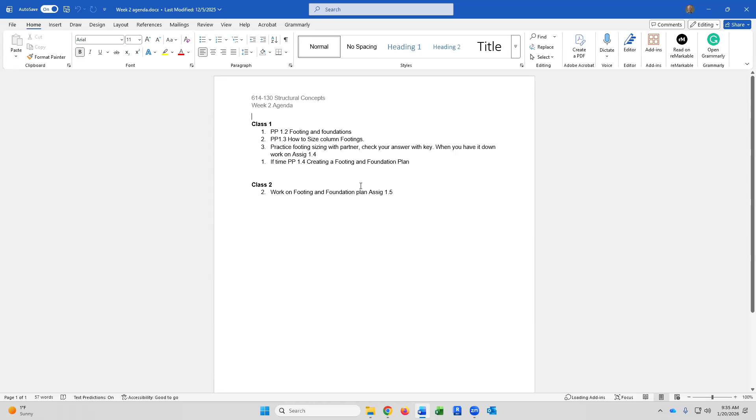Let's look at footings and foundations.

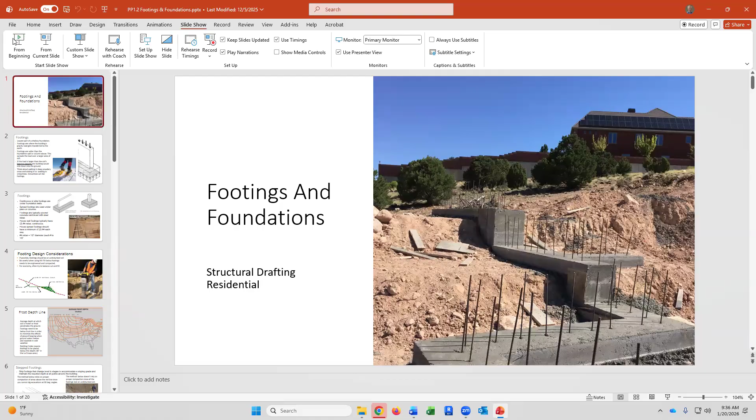I kind of like this picture because it shows a couple things. This is probably a walkout basement, where the foundation has to step out and we're at the lower level looking up the hill. A couple things I wanted to point out.

When you dig a step in the dirt, you can't dig a 90-degree step because the dirt would collapse down - it's not a solid material. The dirt's got what they call an angle of repose. So everybody understands, if it's loose soil, not like clay, you can't cut a 90-degree angle in and expect it to stay - it'll mush out. So as they dug this in different levels for the steps, they've got this angled part here and this angled part here.

Now there's two different ways of doing it, and I've seen both ways on the site. I have an idea that one way is better than the other. One way is they form it up like it's cut at a 90-degree angle, and then try to pack dirt in underneath that area. The other way is saying we know we can't really pack dirt in at the right compaction there, so we pour the bottom of that footing at an angle to match the angle of the dirt. That's the better way. Now why don't people do it that way?

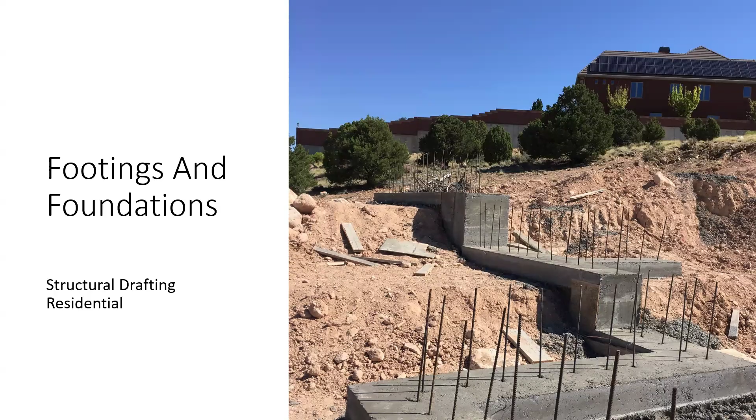So working from the ground up, the bottom part of a building is called a footing. It's the lowest part of the building, the part where the building's load, the gravity load, gets transferred to the dirt or the earth. So the footings are typically wider than the foundation wall or the column above, to spread the load over a larger area.

If we somehow had a building where the load is more than what the soil's bearing capacity is, the building actually sinks down into the ground because it's putting that load on a very small area of soil. So we want to spread it out so that if the soil can take 2,000 PSF, we have to spread that load out so it's 2,000 PSF maximum.

Does that make sense? The way you can kind of visualize this in our climate is, have you ever tried walking through really thick powdery snow and sunk down into it? That's what your building theoretically would do if your footing isn't big enough. So in certain conditions, you can put snowshoes on and walk on top of the snow, spreading your load out over a bigger area so you don't punch down into 3 or 4 feet of snow every time you try to walk through it. You can walk on top.

When I was younger, people had snowshoes and everybody had snowmobiles because we had so much more snow. I know the climate's changing, we're not going to get into why, but it's definitely changed over my lifetime — snowbanks 5-6 feet high all winter long, snow all the time. Everybody had snowmobiles, snowshoes, cross-country skis. It's not quite like that anymore. We do get snow, but not near the depth. So maybe you've never used snowshoes, but just take my word on it.

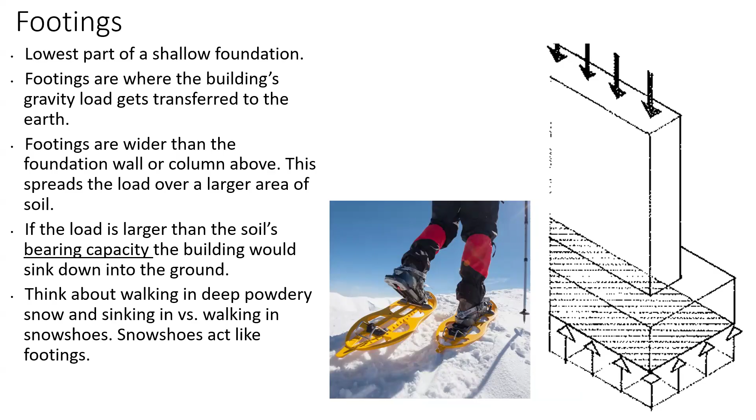Okay, so we have two different kinds. There's one footing that's under a wall, called a continuous footing or a strip footing, also called a wall footing as you see on the diagram. Then you can have an isolated column footing, also called a spread footing, which is under piers or columns. Those are the ones we're going to be sizing in our assignment today.

So they're typically poured concrete, reinforced with steel rebar. Houses typically use 2 number 4 continuous bars. This one looks like 3 number 4 continuous, so it's got one row here, one row there, and one row there. When they say continuous, they overlap them rather than having one piece of rebar that goes around the jigs and jogs, and they tie them up with wire ties to keep them together.

Then for house spread footings, they typically put 2 each way, 2 number 4 rebars. When I say number 4 rebar, each number is 1/8 of an inch, so a number 4 rebar is 4/8 or a 1/2 inch diameter. A number 5 rebar is 5/8 inch diameter. You're not being tested on that, but it's a way to visualize it - if somebody tells you they got a number 4 rebar, you know that's 1/2 inch diameter. That's a very common size in residential construction.

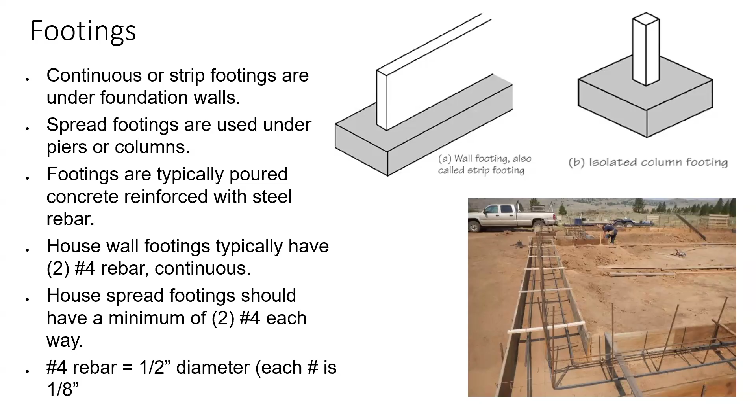And then these are like L-shaped rebars, and they cast those into the footing like you saw on the first slide, then pour the wall on top of it. So those L-shaped rebars tie the foundation wall into the footing when they pour that.

So if possible, we want our footings to be on undisturbed soil. Have any of you ever dug a big hole in your backyard and had this big pile of dirt that you never moved? Over the years, as it froze, snowed, and got rained on, it compacted down - going from 6 feet high to 3 feet high because the weather compacts it. Now the dirt we walk on has been here for thousands of years and it's already been compacted - it's gone through freeze-thaw cycles. But when you dig a hole and pile the dirt up somewhere, it's all fluffy.

Have you ever baked a cake and packed the flour into the measuring cup? You're not supposed to do that because your cake will get too much flour - it's supposed to be light and fluffy. It's the same sort of thing: you can pack soil down into a smaller area and it's much more compacted. We don't want to build our houses on fluffy soil. So that's called fill - when we bring in soil that hasn't been there for 1,000 years.

Here's where it can be a problem. Imagine you're building on the side of a hill and want to make a level area. In order to avoid bringing in a lot of fill or digging into the hill a lot, economically it's good to balance cut and fill. This is the cut, where we're digging out of the hill, and this is the fill, where we're taking that dirt and making a level area. If this cut area equals this fill area, I don't have to pay to bring in dirt, or truck dirt off my site. I'm balancing where I'm cutting out of the hill and where I'm filling to make my level building pad.

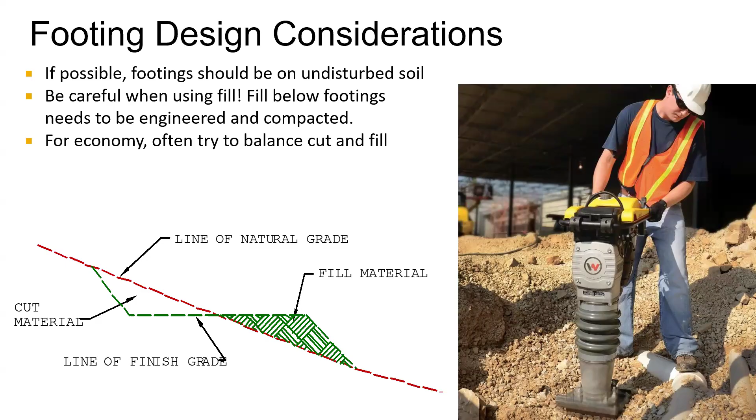They roll along and compact while they're rolling. This is called a jumping jack. When I worked at a design build firm, they made me go out on job sites, and this was one of my jobs, running one of these jumping jacks. It's kind of a pain in the butt, because if you get it off, it tries to jump at an angle and you've got to hold it up. But that's how they compact it. What they typically do is put a foot of fill down, run the compactor over it, put another foot down, run the compactor over it, because that's how they get it compacted evenly all the way up, even with like 8 feet of fill.

On a day like today, where it's below zero with a below zero wind chill, if Fluffy the cat dies and you want to dig a hole for Fluffy, it's going to be like concrete. You can't get a shovel into it, you can't dig into it, because that ground freezes and gets very hard, since the frozen water in the ground freezes in the areas between the soil and gets hard as a rock.

You see this a lot on farm buildings, because many don't have frost depth footings. My parents had a farm, and we had doors that wouldn't open in our buildings in winter when they would in summer, and vice versa, because the ground was heaving and the doors were moving up and down relative to the dirt. We also had a crack in our garage where in winter, when the ground froze, we had like a 2-inch crack we had to drive over to get into the garage, and in summer when the ground thawed, it would straighten back out.

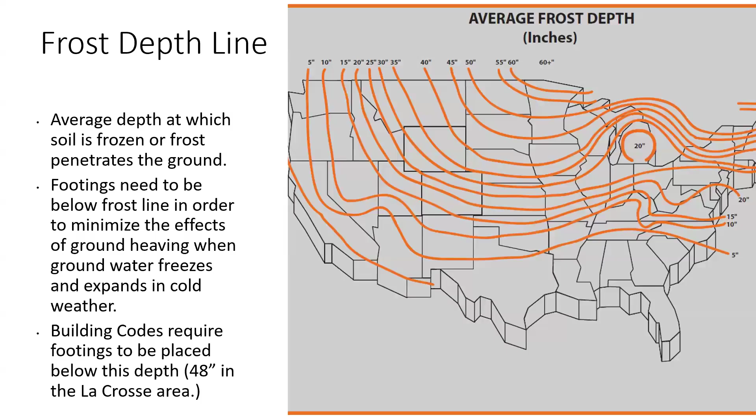Any questions? I've gone through 5 slides. Okay, I've got 15 more.

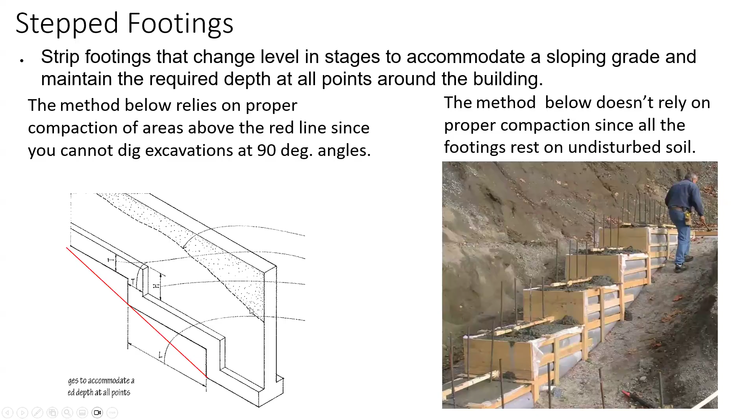Okay, so let's talk about the bearing capacity of soil. On a commercial project, almost always you'll have what's called a geotechnical report, or informally a soils report done. These are specialized people that go out there with specialized drills and figure out what the soil is and how much load in pounds per square foot it can take. Now, if your client won't pay for a soils report, it's not a bad idea to go out and talk to other people - if they're building a lot of houses around you, just see what the soils are like, talk to other contractors.

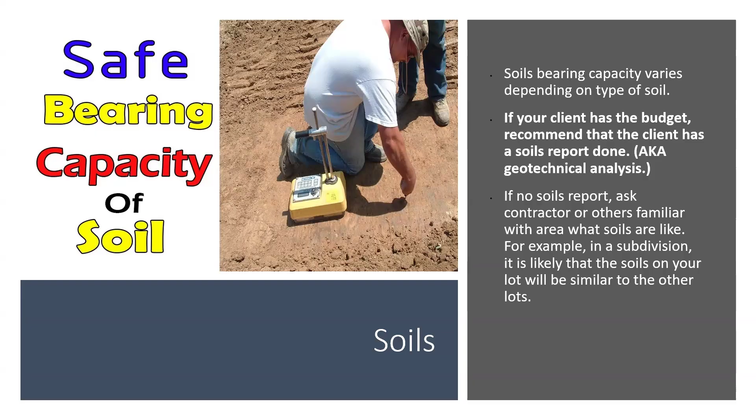Because you might find out, for example, that if you dig down 4 feet you hit water, so everybody's setting their house higher than they normally would, because there's a layer of clay keeping the water up there. So I'm going to show you on this next slide what a soils report is, how it's done, and what it looks like. They do like a hollow core, and they core down when they drill - they're not just drilling and forgetting what they're drilling through. They're actually saving core samples as they drill down, then pull it out, analyze it, take samples of it, test it in a lab, and figure out how much load it can take.

So for example, on this one, just because you walk around and it looks like good dirt, it doesn't mean you have any idea what's down there. Say your foundation on a commercial building is 10 or 12 feet below the natural grade - you have no idea what's down below you, right? It can be beautiful dirt all the way down, it can be sand all the way down, but you can dig down 5 feet and find a bunch of rotting tree stumps and peat, because it used to be an old marsh with a bunch of rotting vegetation underneath you.

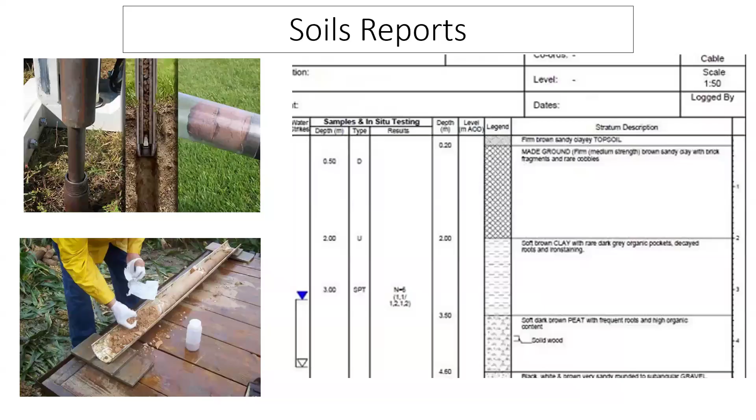So for example, this one here is clay with decayed roots and iron staining. This has got brick-made ground, so this is probably stuff they filled in on top of the old marsh that was there, which has brown sandy clay with brick fragments and rare cobbles. So like when they tore up the street, they're like, hey, dump it in my lot, I got this marsh I want to build on. Then the next layer down is soft, dark brown peat with frequent roots and high organic content with some solid wood. Now, do we want to build our houses on decaying vegetable matter? No, we don't, because it's going to keep decaying and decaying and sinking down. So around here you can run into peat because we've got marshes and little old lakes that used to be there. And I know that's what my name is, but peat is bad for buildings - we don't want our buildings to be in peat.

Okay, so I'm going to tell you 3 examples of why, in my career, soils reports are a good idea. I was working up in Wausau. We were building a building near the top of a hill.

I talked to the owner and the contractor, and this was a medical building that we were doing an addition onto. They said, well, we'll hit rock a few feet down, but it'll be soft rock and easy to remove with an excavator. So they didn't listen to me and refused to pay for a soils report. If the owner has to pay for the soils report, I can't force them to pay for it. If they're too cheap to pay for it, they just don't pay for it. So we designed the soils based on worst case scenario, 2000 PSF, which is the lowest bearing you can typically do, but we just believed them that we'd hit soft rock.

What happened was, where you put an elevator you've got to dig down even 4 feet deeper because the elevator's got a pit in it. So when they started to dig for the elevator, there was this vein of very hard blue rock that required very expensive special equipment, something like this, but with a tungsten diamond point on it because that was the only thing that would break this rock. Because it was next to a building, we couldn't just drill holes and put dynamite in there, or we'd have blown up the existing building.

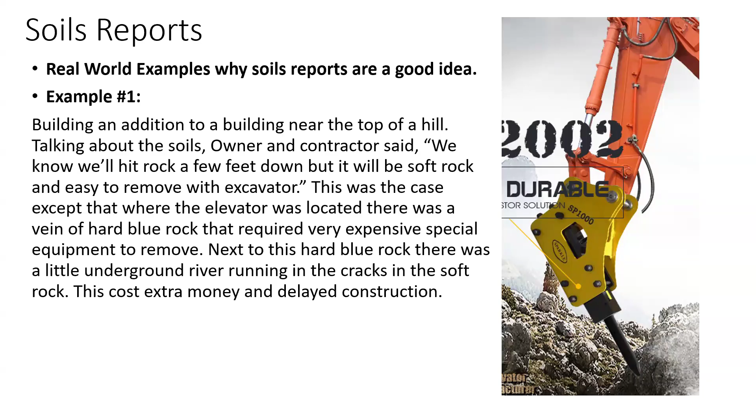So this all cost extra money and delayed construction. Now, if we'd have done a soils report and punched a boring down where our elevator was going to go, we would have at least known what the problem was. The other thing was, we might have decided, hey, let's try to punch a hole on the other side, maybe redesign our building so we don't have to go into the underground river here, and go on the other side of it instead. But they didn't listen to me, so they ended up taking a risk and that came back and haunted them.

Now, you're going to see a pattern here. I don't know what it is, but people, if money was at stake and I told them to do something to save money, oftentimes they wouldn't listen to me.

So here's another example, here in the La Crosse area. I'm not going to name the building, but I could. Why do we need a soils report? Again, the owner and the contractor both said they were adamant about it. They know this whole area is sand 20 feet down, because this is an old river valley. It used to be sand, sand, sand. We're not going to have any problems with soil.

So they dug down, sand, sand, sand. Then they got 6 feet down and there was a layer of impermeable clay with water sitting on top of it. The reason it had impermeable clay is back thousands of years ago, that was a little lake or marsh or something, and the clay had built up, which kept the water from draining down into the sand.

So what happens if you've got this huge area, like miles square, with this impermeable clay layer and water sitting on top of it? What happens when you punch a hole in it? All that water wants to drain down into the hole you just punched. So they're trying to dig the foundation and it's water, water, water. You just have to keep pumping that water out until you've drained all this water that's been sitting for hundreds of years on top of this impermeable clay layer. So this also cost extra money and delayed construction.

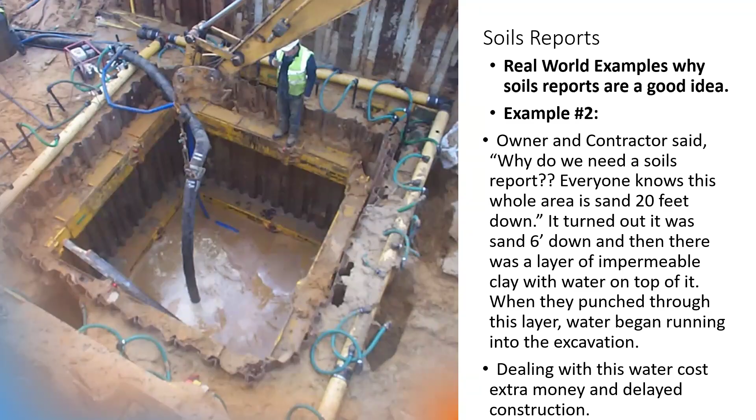The last one I'm going to talk about is one where we actually did a soils report and we knew what we came up with. I used to work at River Architects at the end of 7th Street, that big silver building at the end of that cul-de-sac. If you ever go down to get to the bike path, there's that big silver building at the end of 7th Street. Well, believe it or not, that lot we bought, when we did the soils report, there's marshes all around it.

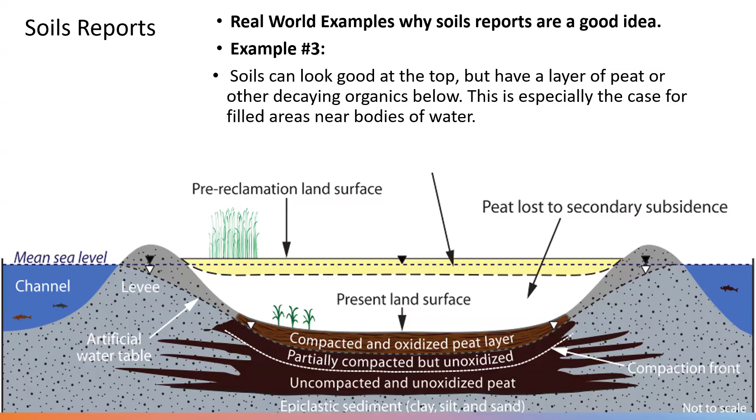The part we were on used to be a marsh, then they filled it in and put a junkyard there. So we were on fill on top of peat. Peat is like all the cattails and algae in a body of water that falls to the bottom but doesn't totally rot. It makes this spongy organic matter. If you walk through a marsh, you're walking on dead and decaying vegetation. That stuff keeps decaying slowly over time, so you can't rest your building on it because it will sink down and down. It was good we did a soils report there because we at least knew what we were dealing with.

Here's a chart from the Wisconsin Uniform Dwelling Code that gives you the various soil bearing capacities for different kinds of soil. If you can identify the soil, the code lets you go with these values, but the lowest is 2000 PSF. So when I don't have a soils report, some soils around here they'll go to like 2500 or 3500, but if they don't do a soils report, I would assume 2000 PSF to be safe because that's typically the minimum you can use.

I checked with the building inspector. Houses typically don't get a soils report, and footings are typically sized for 2000 PSF. I talked to the chief building inspector in La Crosse and that's what they told me. Commercial projects typically do get a soils report, unless the owner is too cheap to pay for it, and they'll tell you exactly what the allowable soils bearing capacity is.

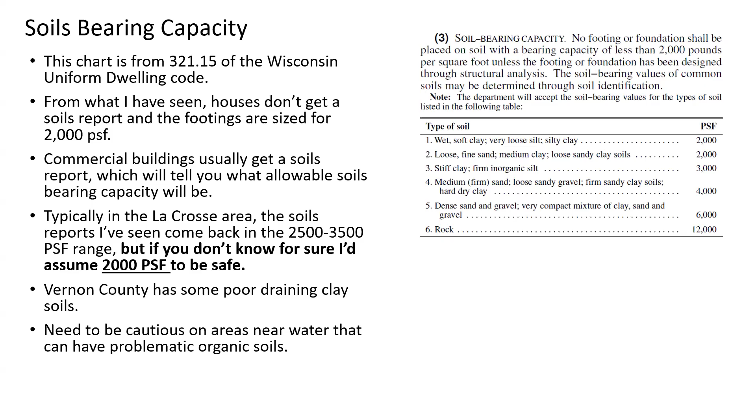Got to be cautious in areas near water because they might have organic soils, meaning peat. Vernon County is notorious for having poor draining clay soils. Around here it's rock and sand, because this area was all river valley at one point, with water from the bluffs on one side to the bluffs on the other, dumping a lot of sand. Vernon County has very poor draining clay soils. If you buy a house there, make sure you don't have water in your basement, because a lot of houses in Vernon County got water in their basement — the soils there are almost like a swimming pool liner, the clay is so tight it won't let water drain through.

Let's talk a little about foundations. Most of you probably grew up in a house with a basement, which is usable space under the first floor. Some of you might have grown up with a crawl space instead — that's when you only need to go down 4 feet for frost, so you just go down 4 feet and call it a day. They still let you have that space under the first floor so you can get to plumbing piping if it leaks, or run mechanical ducts or electrical down there. But it's basically built like a basement in most cases, just with less headroom.

Personally, I hate crawl spaces. Hate them, hate them, hate them. You already have to dig down 4 feet to get below frost — it doesn't cost much more to dig 4 feet further and have a full basement. Basements allow you to store stuff, have workshops or other uses down there, even play pool. If there's a tornado, you can go into the basement easily. If people are fixing your plumbing or heating, they're not crawling around hitting their heads on the floor joists because they've only got 3 feet of headroom.

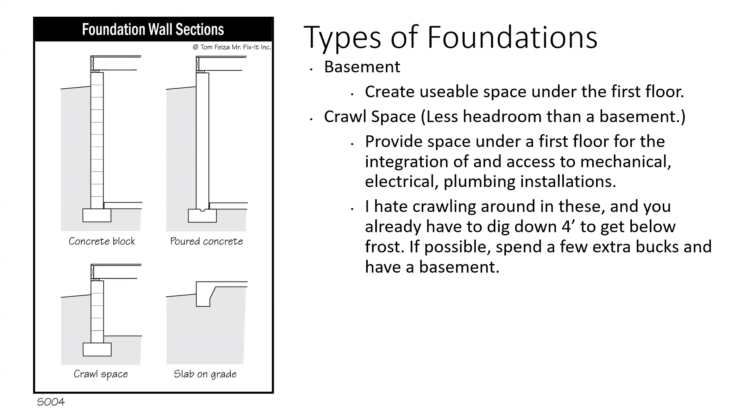Okay, so let's talk a little about slab on grade. The first thing is you got to dig down 4 feet anyway. So you're gonna have to dig a 4-foot foundation wall around it, and then you have your slab on grade. So the distance between your finished grade and the bottom of your footing has to be 4 foot minimum.

Now there is such a thing called a frost protected shallow foundation. The reason we have to go down below frost is that we're concerned about that frozen ground thawing and freezing and moving our house up and down. Well, the way we stop that, by not having to dig a frost wall, is we put insulation way out to keep that cold from the outside from getting in underneath our building. The ground's always at 50 degrees and our building obviously isn't 100 below or 50 below zero, so there's some heat here. So if we put a layer of insulation under the dirt, it will keep that cold from coming down and freezing the area directly under our building, and then we don't have to worry about our building moving up and down.

Now, in theory, you can do this on houses.

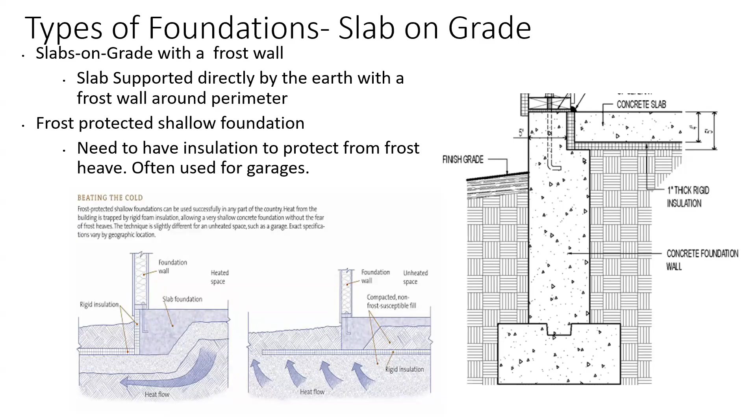At least when I was working, it was never done on houses, but a lot of times it was done on garages. Real world, are you seeing this on garages or houses or both? I've seen it on both. I might actually have pictures of it. So it's becoming more and more common, but when I was doing houses, it was not common on houses. It was more common on maybe a garage.

So now let's talk about how we make foundation walls. In my opinion, the best foundation wall is a poured in place concrete wall. There's different ways you can form up that wall. You can have wood forms, aluminum forms, or insulated concrete forms. We'll deal with that on the next slide.

Concrete block is probably the other most common material in Wisconsin. Around here I see more poured concrete, but if you go to Milwaukee, they had a very strong Mason community and Mason unions, and they were very cost effective doing block foundations. So you see a lot of block foundations in Milwaukee on the eastern part of the state.

Now, those of you that know what your foundation is, let's have a show of hands. How many are concrete? How many are block, where you see the lines? Okay, so it's about 50-50.

Concrete block is okay, but in my opinion, it's not as good as a poured wall because all these mortar joints are weakness planes.

And then there's something called permanent wood foundation, where they don't put any concrete below ground. They just make it out of studs, pressure treated wood, and hope their waterproofing holds up as long as the house does to keep the studs from rotting. We've already heard from Shane on our mold side, but he dealt with one of these houses where it actually rotted out. So I am not a fan of permanent wood foundation. If I had a client that insisted on one, I would say get somebody else because I'm not going to put my name on it. In my view, the part in the ground should last at least 100 years, because there's plenty of 100-year-old houses around here that have been remodeled and fixed, but you don't put wood below grade. I just have a problem with it.

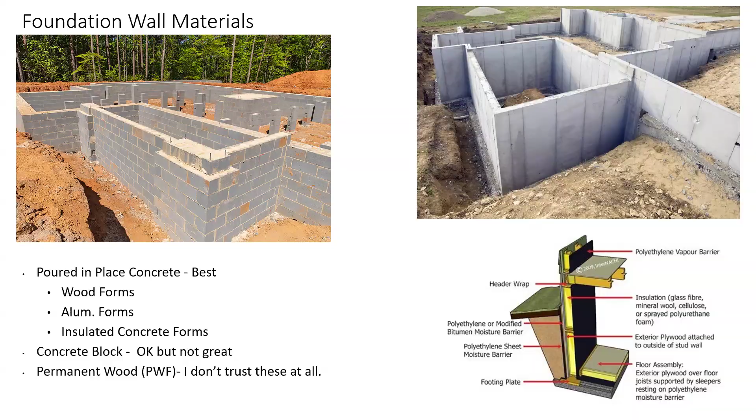Okay, so let's talk about poured in place concrete. You need to put formwork up. It's like a cake pan when you make a cake, you need to hold the concrete in the shape you want before it cures. So this is showing wood forms.

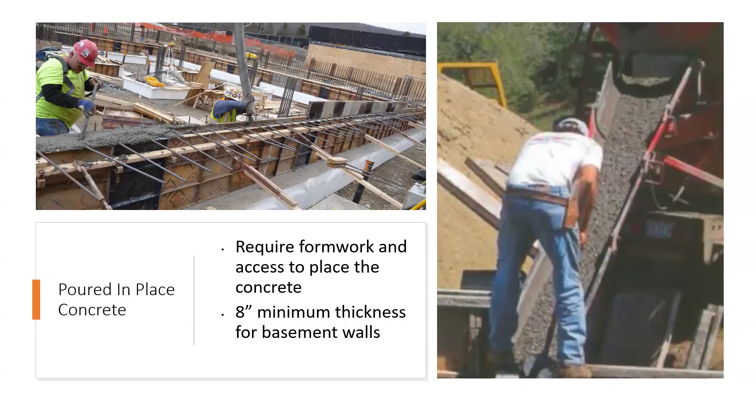And then you need to place the concrete. This is showing a chute, if you can get your truck nearby, otherwise they use pumper trucks, which is what's showing here, with a big boom that comes out and fills the walls. Or if things are really bad and you can't get a truck or boom truck, you can have ramps with wheelbarrows, and that's a pain in the butt, you don't want to do that. If it's not engineered, there's an 8-inch minimum thickness by code for basement walls.

So I think this is a great system, it's becoming more and more popular. Have you seen it on any jobs? Yeah. Okay, so it's becoming more and more popular, and you don't have to do just your foundation, you can do your whole house all the way up to the roof with this stuff.

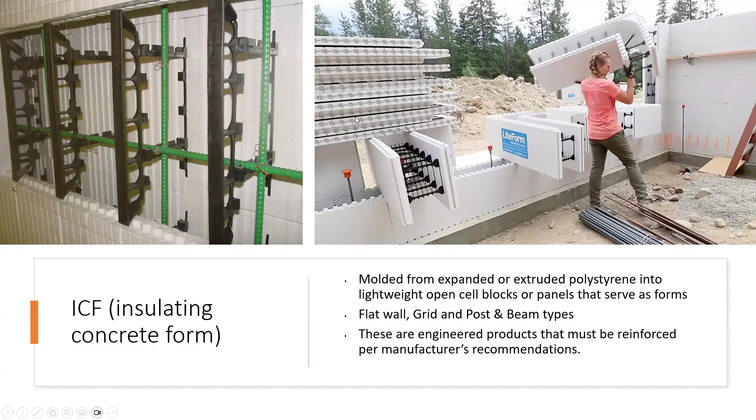It's a really nice system, and it's really great for DIY builders. I ran into a lady when I got hired here that was the HR person that helped me with my paperwork. She was about my age, and she built her whole house herself, stacking up ICF forms. She just had her nephew and his friends help her when they poured it, and she built her whole house herself by just stacking up these adult Legos. Then had some help for the pouring, and she had the walls, everything up, and it's solid. It's got a lot of advantages to it.

Okay, so concrete masonry units, we end up with a concrete wall, except it's concrete block, and we don't have to have formwork. So if we can't get a truck in, and all we can do is pick up a block and carry it and put it on our wall, well, then it makes sense. I don't think it's as good as concrete, because the mortar joints are always weaker than poured concrete. So there's always weakness planes if you've got too much water making soil pressure on the outside of your house. I've seen a lot of block walls that have caved in or cracked into the house because of soil pressure, or like a big construction machine driving too close to the concrete block.

Now, if you want to make it super strong, you can fill all the cores with concrete, and then it kind of becomes like a concrete wall where the concrete block is the formwork. What's another name for concrete block? Concrete masonry unit. So a lot of times in the field, you'll hear it called CMU.

So here you can see there's some rebar down on the floor. What are those white snaky things there? What do you think that is? In-floor heating. So if you want to have your floor in your basement nice and toasty warm, they take these plastic pipes and then run hot water through that to warm up the concrete.

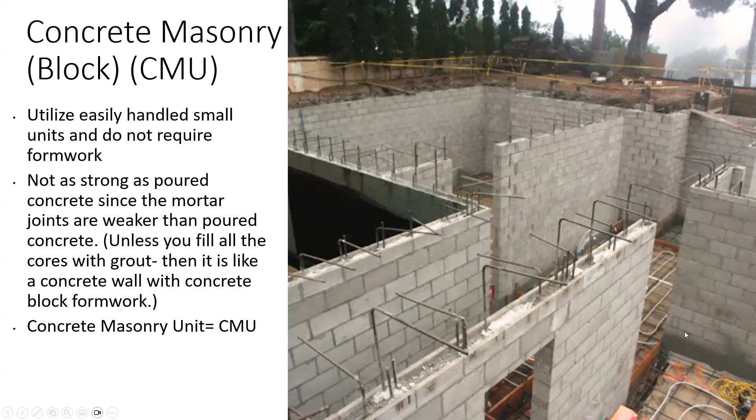Okay, one more slide after this one. As we mentioned before, water is a huge problem in basements and crawl spaces. So if you're going to do it right, you need to make sure you keep the water out of the house. There's two ways you can get water. One is surface water, the water that falls from rain or drains off your roof, the water that hits on the surface. In that case, we either have downspouts that kick the water away from our house, we slope the foundation away, we slope the ground away from the foundation. That lets all that surface water get moving away from the house so it doesn't stay up close to the house.

There's other ways of getting water in the house, which is a water table. The water has a certain level that if you dig down far enough, you'll hit water. So if you get closer to the river, if you dig down far enough, you're going to hit water. Sometimes it's not at the level of the river, sometimes it actually comes up a little from where the level of the river is, just from the pressure of that water going into the soil.

I know I did a project where our office in Madison was on the isthmus between the lakes in Madison, and we had a little river running through the basement of our building. It's an old 1880s building. And that's because there was a high water table, because we were on that isthmus where the Capitol was, surrounded by lakes on all sides. And so that water actually, if I draw a little sketch here.

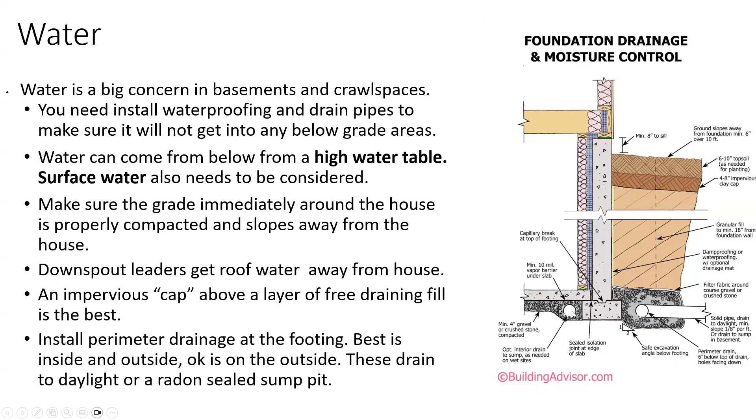So what happens here is we have these pipes go through the footings and they go into a sump pit in your basement. Have any of you gone into your basement and seen this thing with a cover on it, or maybe there's no cover and it's got a couple pipes coming out of it, or one pipe coming out of it? That's a sump pit, and it's got a sump pump in it.

So this is where the water comes in from those footing drain lines and starts to fill this up. This is just like the float in your toilet. Once the water gets to a certain level, that float kicks in and pumps this out. What happens is this gets pumped up to above grade and then it gets spit out.

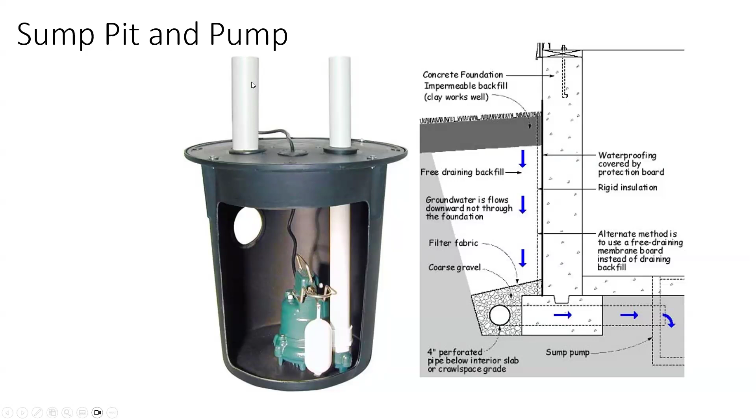There's typically a flexible pipe that gets it away from your house, because otherwise it would just drain back down and the cycle would go over and over again. So if you ever walk by somebody's house and there's this flexible pipe coming out of it with water gushing out, that's probably what's happening. If this pump wasn't there, their basement would start filling up with water. This pump is the only thing pushing that water out before it reaches the level of the floor and comes into their basement.

Now, what happens if you're in an area where the sump pump is running all the time and there's a bad thunderstorm and you lose power for 6 hours? What's going to happen? Your basement is going to start to fill up with water. So what do you do then?

You get an emergency generator and run your sump pump off of that, or your sump pump has a little battery backup on it. Now, what happens if your sump pump actually fails? Then you put in 2 sump pumps, called duplex pumps. If the first one fails, the second one's float is a little bit higher and that one kicks in, because you don't want the water to fill up your basement.

So as you're looking for houses, whenever somebody asks me, like a friend or relative, to look at a house they're thinking of buying, because I'm an architect, I spend all my time initially in the basement. I'm looking for evidence of water problems, foundation cracks, the wall bowing in. Because if that foundation is bad, it doesn't matter how beautiful the rest of the house is, eventually you're going to have to deal with it. And if the foundation is bad enough, the home inspection report comes back and says there's water in the basement and the wall is cracking.

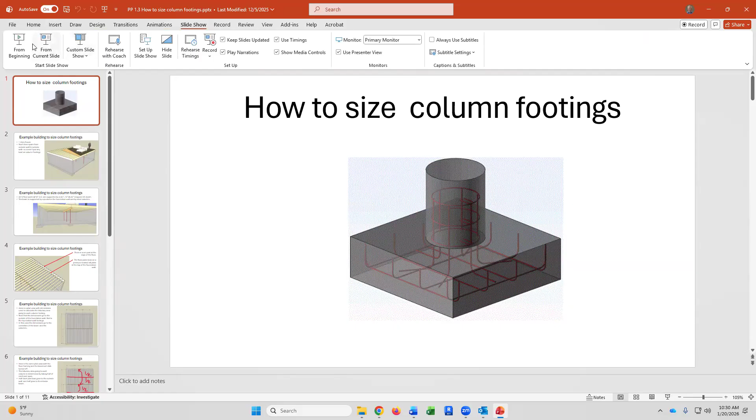Okay, so we're going to talk about how to size column footings.

As you can tell, I was working in SketchUp just to help you visualize this, and I built a little one-story house here. There's my basement slab, there's my footing spreading the load out, there's my foundation wall. But underneath those columns, I need square footings because they're actually taking a big part of this floor load. We're assuming the walls go up here and it's a one-story house, and the roof has trusses that clear span.

So there's no roof load coming down, it's just floor load. What is our floor load? Remember, it's dead load plus live load. The dead load is the weight of all the floor joists and the plywood and anything permanently attached to the floor. The live load is furniture, maybe they got a water bed, maybe they're going to have a party with a lot of people.

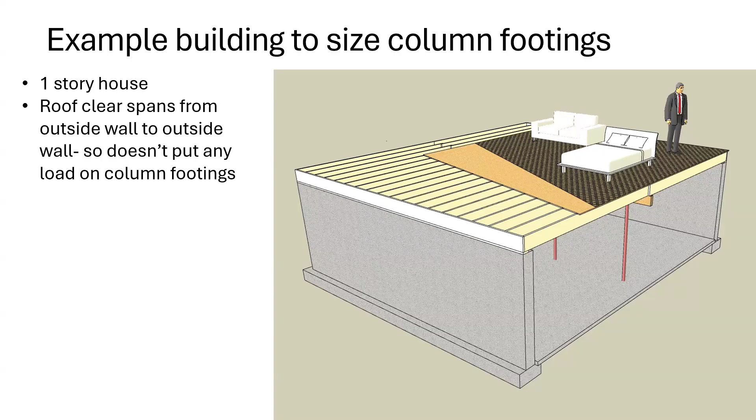So that footing has to be sized to take all that load and spread it out, because that column is only 4 inches in diameter. If we don't put a footing under that column, it's going to punch down into the ground, because believe it or not, these columns are taking more load than the wall is. It's being concentrated, taking half of this span to that beam and column, and half of this span is going to the beam and column. So that outside big thick concrete wall is only taking a quarter of that whole span distance, half of it's going into the beam in the center.

Let's explain a little more detail. Just to show you my assumptions, I've got 2x12 floor joists, so those are these things here. This is my sill plate, that's what's bolted to the foundation wall. This is my rim joist here.

Then I've got 2 LVLs, laminated veneer lumber, they're 1 3/4 by 9 1/4 and they're dropped. Those are holding up the floor joists. The beam is supported by a pocket in the foundation wall, and then it's supported by steel columns. As you see, underneath every one of those steel columns, there's a square footing, and that's what your assignment's going to be, is to size that square footing.

So that's the rim joist again, and this is my plate, just another view of that.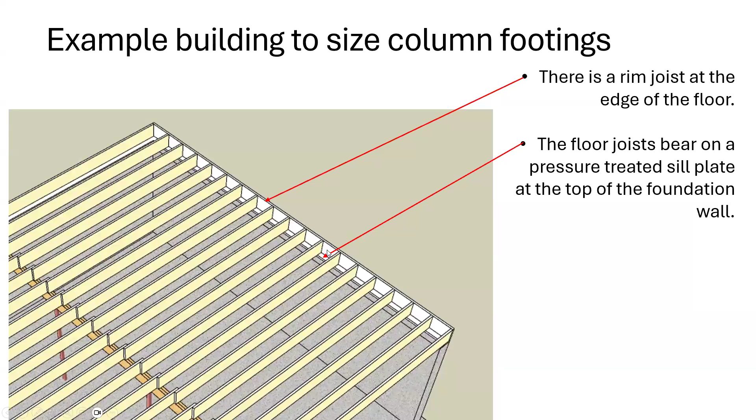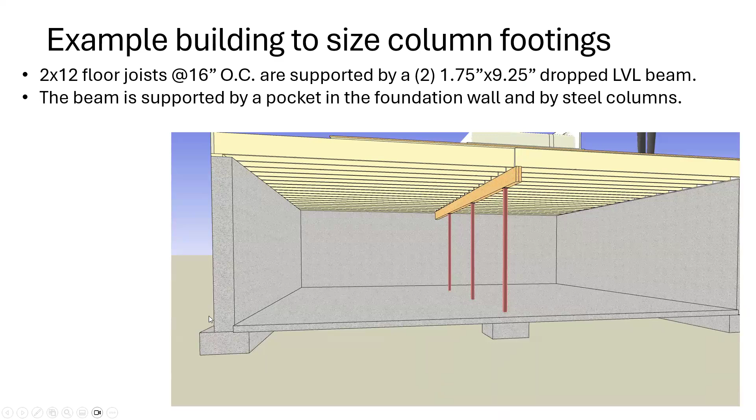Let's just go back here. I'm not dimensioning it to the outside of the footings, I'm dimensioning it to the outside of the foundation wall. In this case, my dimensions are going to the center line of the beams and the center line of the columns. So this dimension, this beam is from the outside of the foundation wall to the center line of the beam, it's 14. And then these are my column locations.

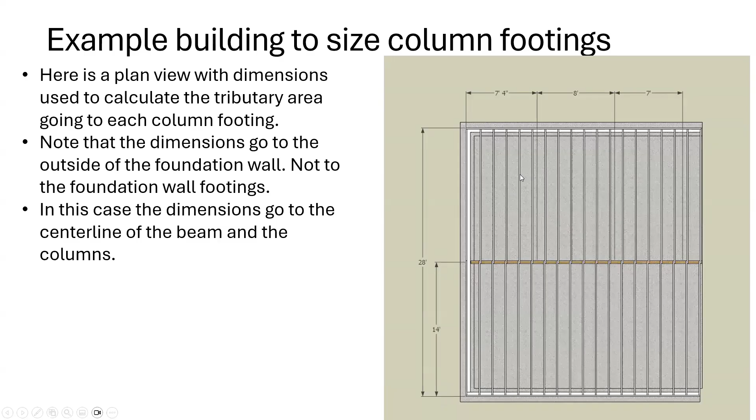Let me just show you. So there's a column here at that 7.4 dimension, and then there's another column here 8 feet away from it, which I forgot to draw on this little sketch that I made.

Like I was saying, the tributary area, we're trying to figure out how much of this floor load is actually being held up by the columns. So what happens is when I've got a floor joist that's spanning to a beam line in the center of the building, half of that goes to one end and half of that load goes to the other end. Does that make sense? It should, right?

So if I've got something that's being held up on both ways and it's uniformly loaded, half the load's going to go one way and half's going the other way. So here's my floor joist going up and down. Half of that load is going to the foundation wall, half of it's going to the beam. Same on the bottom side. Half of that load goes to the beam, half of it goes to the foundation wall. So you see overall, out of these, this is only taking a quarter of the load from the floor. This is taking a quarter of the load from the floor, and this is taking a half of the load from the floor. So it's very important, right? Because it's taking twice as much as those foundation walls on each side. So that'll make sense, nod your head. Okay.

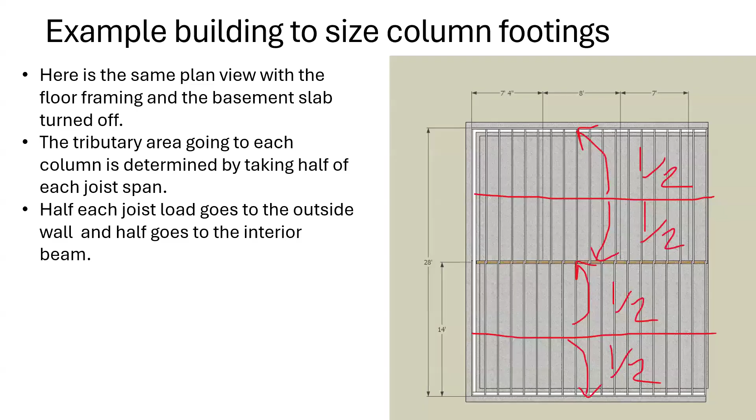Now, when I've got those beams, and this time I drew the columns in, so my beam's going from wall to column and from column to column and from column to column. So that beam, half of the load goes one way and half of it goes the other way.

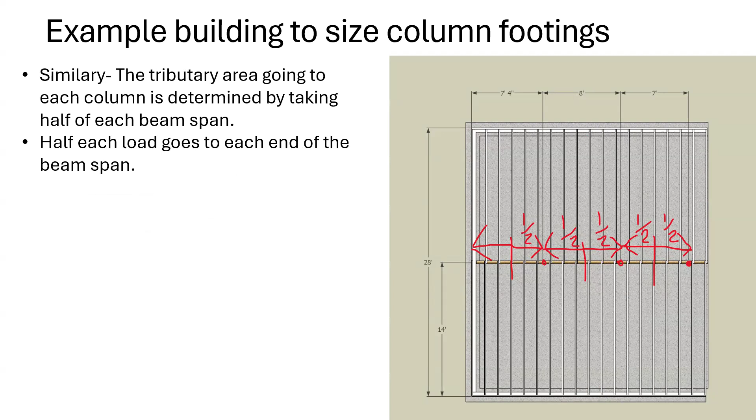Let me just show you the next diagram, which I think will help explain how this all works. So I'm trying to find the tributary area. How much of that floor is being supported by that column? So what I do is I take half of the dimensions. So if it's going from the outside of the outside wall to the center line of the beam, it's going 14. So I'm saying that 7 feet is going to end up into that column and 7 is going to go to the concrete wall.

And in this one, I'm only got 7 feet between columns, so that's 3'6". So that's 7.5 feet times 14. Everybody tracking that part? Anything inside of that box has got to go into my column and eventually it's got to get spread out onto the footing and go into the dirt.

Let's pause it here and open up our calculator. I used to have a pen, but on my new computer I don't, so let me pen it in here. So there's your square root. Let's try this: 2.8875, square root. This is 1.69, or 1.699.

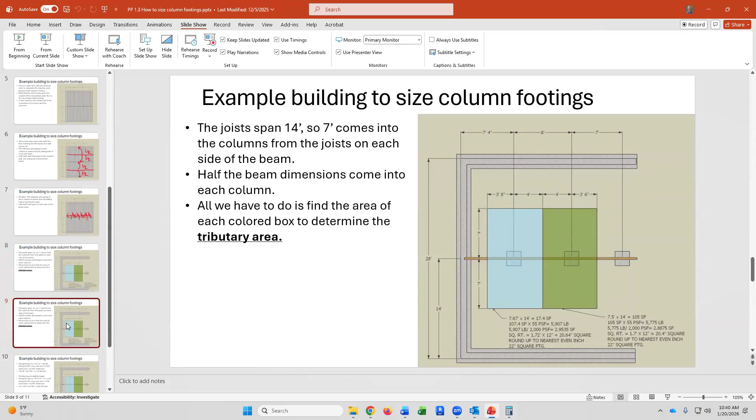So on my example here, going back to my slide, I end up with 1.7 when I get the square root. That means my footing needs to be 1.7 feet in both directions, a 1.7 foot square footing, but we're going to change that to inches. So I take 1.7 times 12 and I end up with 20.4 inches square. Then we round up to the nearest even inch number. 21 is not an even inch, but 22 would be, so I'm going to make that a 22-inch square footing.

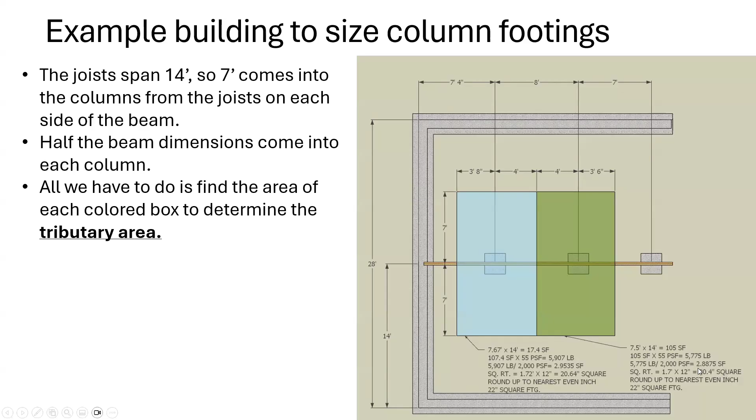Now that I've explained it, let me show you a bigger slide, which I probably should have started with. So there's the math again: we figure out the area of the box, our tributary area, and figure out how many square feet. This blue box is 107.4 square feet, and the green box is 105 square feet. Then I use my 40 pounds live load and 15 pound dead load, add those up, and get 55 PSF total load. Then every square foot is 55, and I know how many square feet I have, so I just multiply them together.

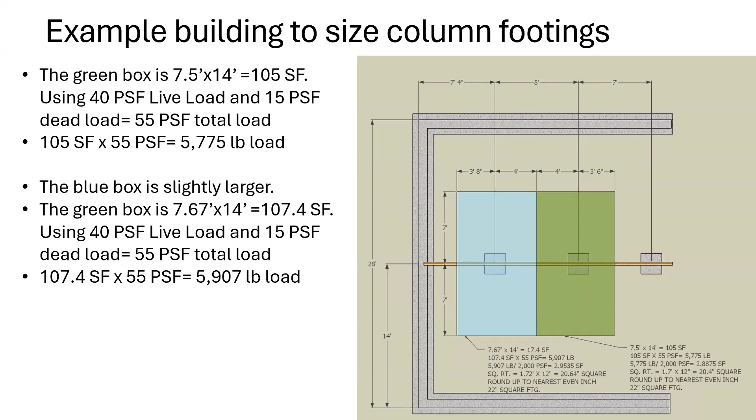Does everybody understand how we got that load that's being crushed onto the soil? We're going to practice this — I'm not just going to give you an assignment and grade it. Practice makes perfect, and you can have this PowerPoint up while you're doing the practice. Then we divide by 2,000 PSF, which is the load we use if we don't have a soils report, and we end up with a footing size in square feet.

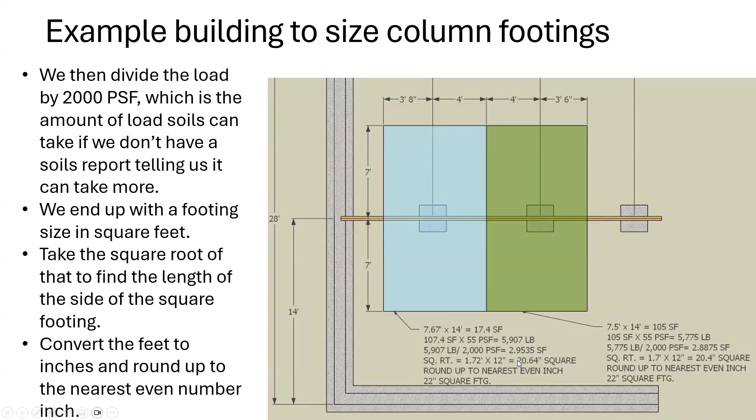So the square foot is there in square feet. Then we do the square root, and we end up with that number, which is 1.72 in this case, inch square, foot square footing.

We times it by 12 to get it to inches, and we round it up to the nearest even inch. I could lecture for another hour and keep droning on, but your eyes are gonna glaze over. We're gonna give you a practice, not graded. This is actually harder than the assignment, and if you can get this done correctly, you'll have zero problem with the assignment.

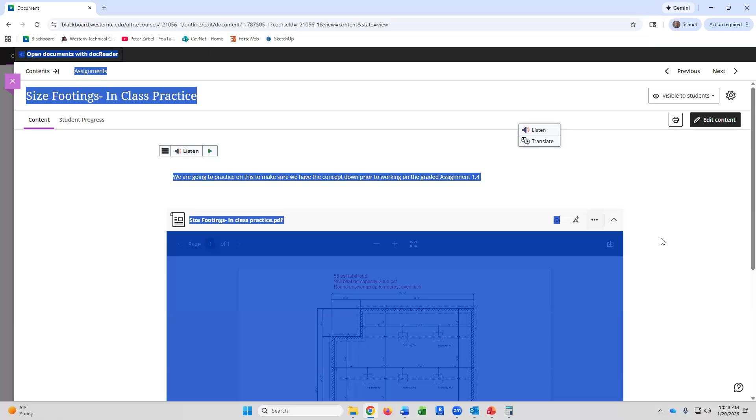I'm gonna let you work on the practice in a group. First off, let me show you on Blackboard the difference between the practice and the assignment. If we look at the in-class practice, those of you remote, I do have the key here, and if you're in person, I've got the key here for you to check.

So let's just look at the in-class practice. I've given you dimensions, and I'm gonna have you size these footings here. Let's get it full screen and bigger, and I'm gonna give you a hard copy to work off of.

So if I'm figuring out how much of this joist, my joists are going up and down on the screen, my beams are going left to right, those are the dotted lines. The little circles are my columns, and the dotted box is my footing.

If I've got 12 feet center line to center line, how much of that 12-foot span is going up to footing 7? 6, right? Half of 12 is 6. If I'm going 7'4" plus 8 inches to the outside of that wall, that's 8 feet. How much of that 8 feet is coming into the footing? 4. So we're always doing half.

Now let's work left to right. If I'm going from the outside of that wall to the center line of the footing, it's 11'4" plus 8, which is 12. How much of that beam's load is coming into footing number 6? If it's 12 from the center line to the out, what's half of 12? 6 feet. Half of 10 is 5 feet.

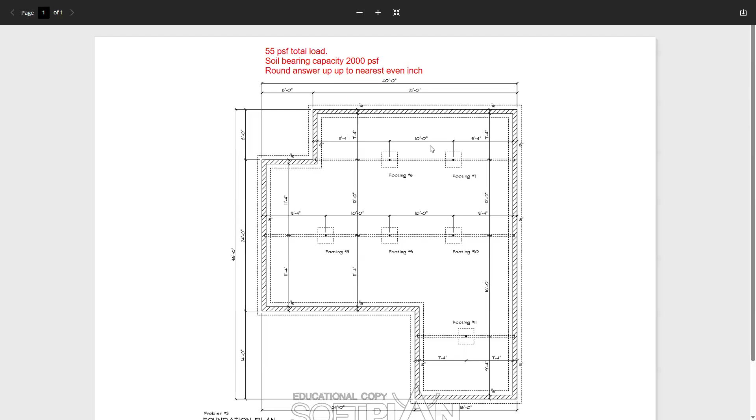So what I'm going to suggest is you go ahead and draw your little boxes around for the tributary area and write the dimensions on the box, then multiply them together and write the square footage of the box. I'm going to give you a quick peek at the key so you can see how I'd recommend doing this.

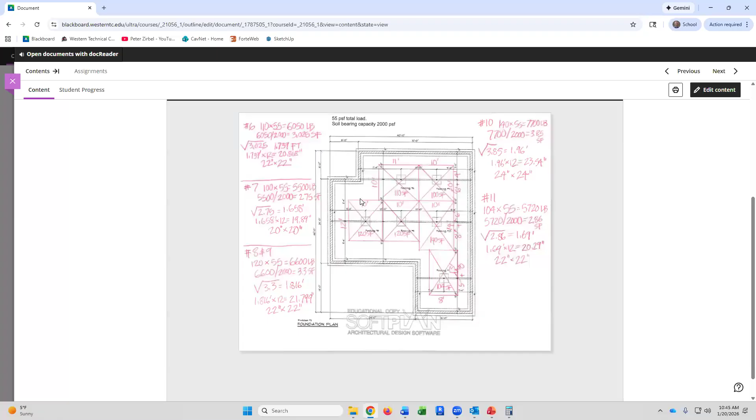So what I do is I quickly draw a box, draw the dimensions in, multiply the dimensions, and make the square footage. Then I do the math the way the PowerPoint shows over there. I'm not going to make you memorize that, but that's how I'd go through and do this practice.

Just to show you that the actual assignment is easier. I used to give the practice easy and the assignment hard, and that didn't work so good. So I'm going to give you the practice easy because it's low stakes and you're working in groups, and you'll figure it out easier that way.

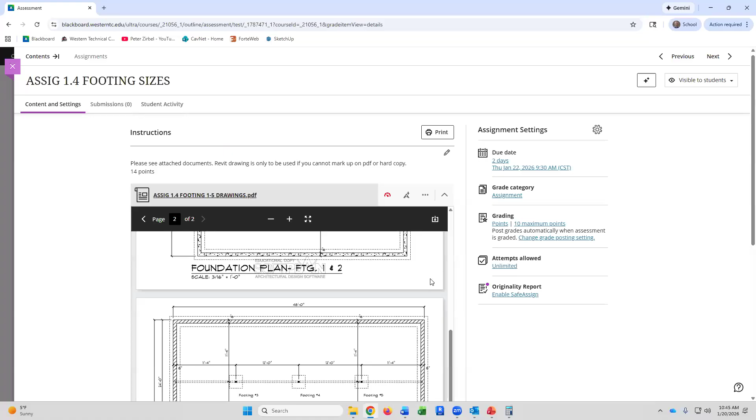The actual assignment drawings are much simpler. There's 2 of them in that little house and 3 of them in that little house. That's the one you're going to be graded on.

So what I'm going to ask you to do is I'm going to divide you up into groups of 3 and work on this together. When you're all in agreement and understand what you're doing, maybe do one and check it, then do the others and check them all. But once you've got this done so you think, yeah, I can do this, I've got this, then come up and I'll give you the real one that you can do for the grade.

This is due start of class on Thursday. I think I've given you enough time to get it done in an hour here, and if not, at least you'll have it done, and then you'll be able to do the real one on your own time. Okay, so I'm going to pause my recording here.